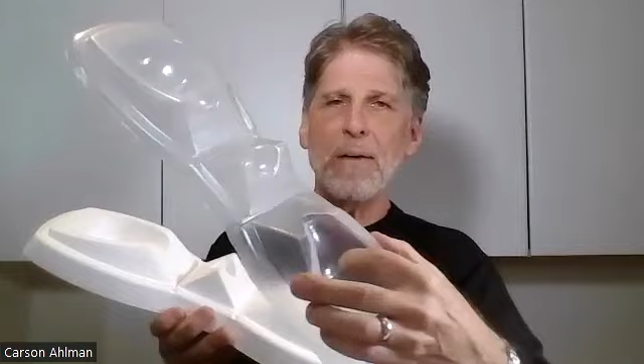And I have rough cut this out of a larger sheet. I'm going to do a more finite cut here along this line that I had drawn on the pattern. That'll be the edge of our flange. So the rest of this material here is excess. But I'm going to demonstrate how to vacuum form that part on there.

Like I mentioned, this is a trifold, so it's in three sections. So these three sections open up flat like this, and we have two hinge areas here, what they call living hinges, that allow this to fold up. What's nice about this, we can integrate our graphic component on the inside when it traps the product, and it completely protects that so it doesn't get dog-eared and beat up, so the graphic is on the inside.

I just duplicated the art on the front and the back, but this could be done with a front art motif and then back art, and then we actually have some printing areas on the bottom. The trifolds are great. They're very secure, have a good, strong footing on here, and then by having all these molded panels, it's very, very strong.

Trifolds are held together in a couple of different ways. One of the most popular ways is to use snap buttons. They would actually be these round little details up here in the top, and you have to cut a hole in your graphics so they can punch through that and they snap into one another. I don't particularly like them. I think they're very unsightly because you get these two pretty round giant holes cut into your graphic area, and they look a little awkward. They're very functional, but I think aesthetically they look odd.

A lot of the vacuum forms that we've seen, we have that complete heat sealed edge, which is completely tamper resistant. It's almost to the point where you just can't open the package. You need tools to get it open. I don't suggest that either. That's kind of the other extreme. I think some compromises aren't bad; since this is a very strong structure, all we really need to do is to seal this at the top.

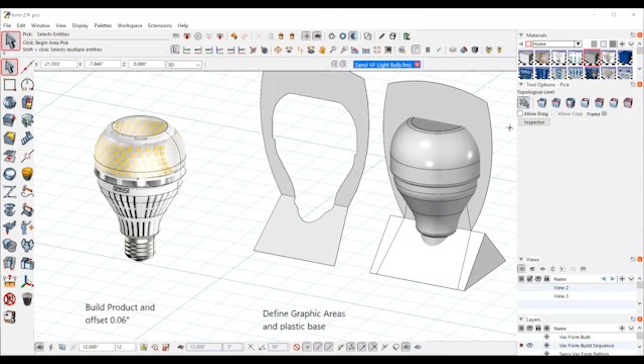So I built a light bulb. It's a pretty straightforward shape, so it's just a revolve. But I texture mapped a photograph on that for rendering purposes. So let's take that off so we can just see the basic shape. I'm just going to color that.

Take that off. All right, so what I did was I revolved that and then rotated it around and made two parts. And then what I would do is just cap off the top, cap off the bottom, and then make it a solid. Now, since this bulb is going to be formed in this pattern in a negative cavity, I need to account for wall thicknesses. So I'm going to do that right away.

So I'll take this light bulb here and I'm going to offset that by 60 thousandths because I am going to have a 30 thousandths wall in my plastic, and then I want to have a little bit of clearance, a little bit of space, just in case it's slightly off and it doesn't fit snug in there. So I'm going to add a little bit. So I'm going to offset that by 60 thousandths.

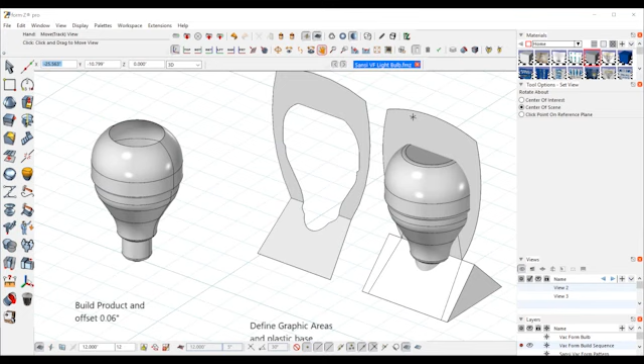And that's what this over here on the right, that's what this shape is. So it's a solid, and I offset it, and then I actually radius the top and the bottom there because that's part of the detail of the bulb. So what I'm going to focus on here is I want to start from the inside out. So that's my bulb. And I know I'm going to do a trifold vac form where it has three pieces.

Now, a trifold has the front and the back that's going to come around and trap the light bulb. And then most of the time, it's a triangular section at the bottom. So I'm going to start with that. Over here on the left is my full graphic area that's going to be on the inside. I want that to be a certain proportion and be thick enough and substantial enough so it doesn't break. So I'm starting with this side view of this triangular base.

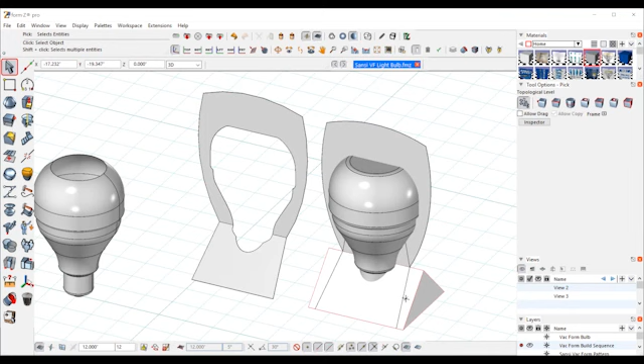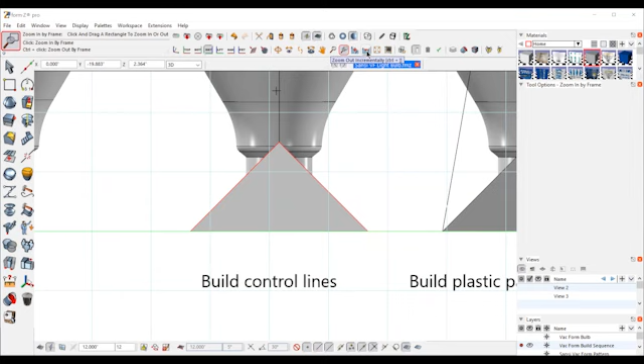So I'm going to look at that on the right side, and I can see how it's coming up around the bulb. It doesn't have to be a right triangle, but I used that and it seemed to work pretty well. So I got 45 degree on each side. It could be higher, could be whatever shape I wanted to, but I liked how high it came up on the bulb, and that was enough. And it also gives me enough of a graphic area on the base. So I'm going to have some SKU information down here on the bottom.

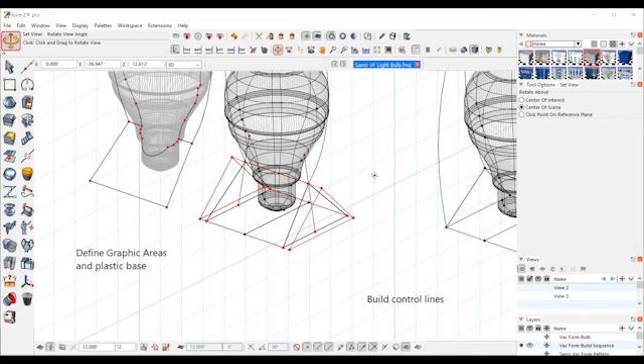So let's just go to wireframe for a second. So there I built my triangle, and then you can see I have these two angled lines on the sides. So I'm going to angle the sides of those so I can build in my draft angle, because I need this to come off the mold. And I also want to determine how much graphic area I'm going to have left. So let's look at that from the front.

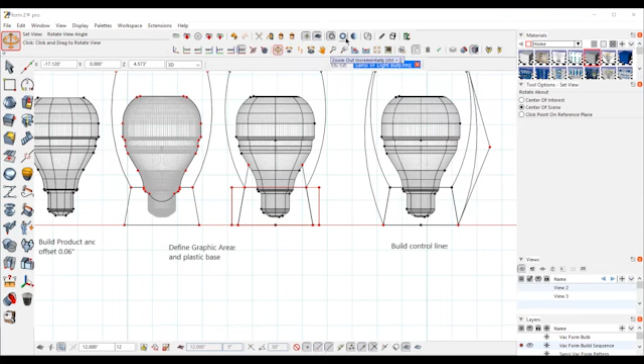So you can see I have these angles, and I'm going to cut that triangular section back down. So I think I probably put, looks like maybe 5 to 10 degrees, which is a safe amount of draft angle in there. So I have that on both sides. So when I trim that, I will have this image over here on the right. So that's the base trimmed, so that's ready to go.

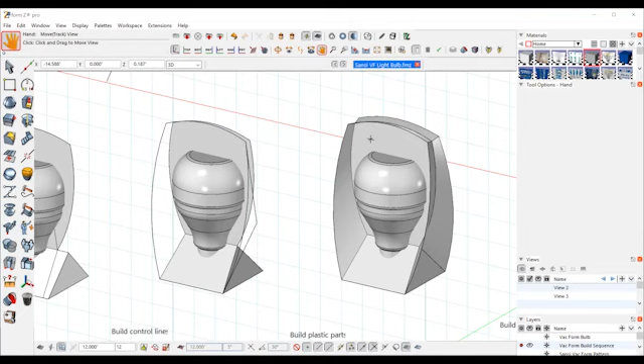So I also want this other beveled look here. I want the edges of the vacuum form to come up on this curve around the outside, and I'm going to work off of my full graphic area that I have here. Let me zoom in back over here. So here's my graphic panels. I differenced the bulb from that graphic panel, and I created that front area. So that looks like that'll work pretty well in the paperboard.

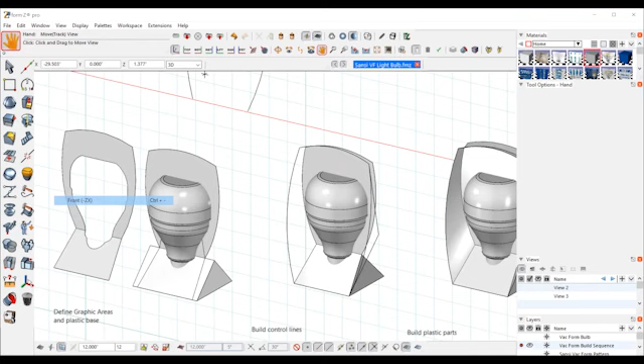So now I'm going to build from that and create the rest of these plastic parts. So I'm going to start with the front curve. And I have that at kind of a minimum draft. So you can see I have this difference off here. Let me go back. I'm going to work with this arc that I have on my graphic. So I'm going to select that. I'm going to move one copy on center.

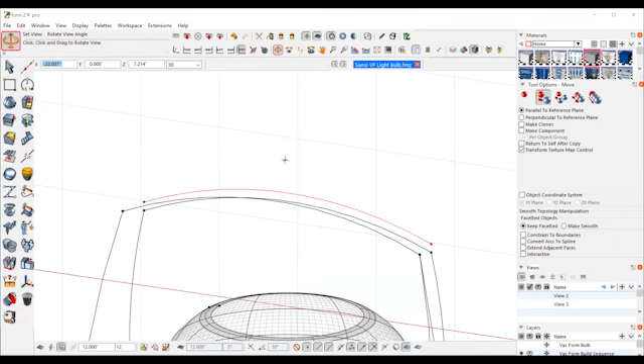And I had the line already created, but what I did was I just estimated how far away I wanted that from that top edge, because that's going to be pretty close to the top. It's going to be right back here, so it's not very far. So what I need to do is take that line, and I need to put that into the orientation that I want to have here on the front.

So what I did was I took that line and I independently scaled it. I'm going to go back to self, locking to the center. Oops, disengaged. Oh, I need to select that as an object. And I'm going to scale, snapping to the middle. And now I have that into position.

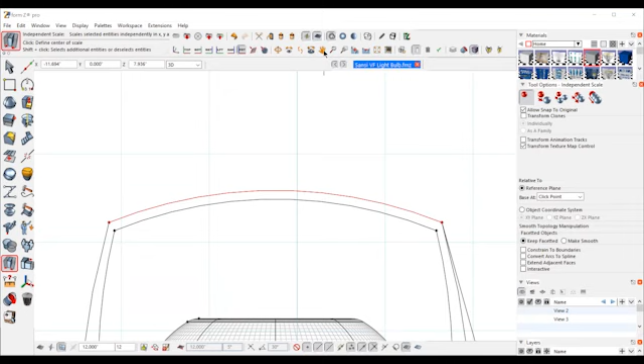I like the distance from that. Now I need to move this and get it to come up to this front panel. So now it's on center. So what I'm going to do is I need to bring that up front. So let's do that right here.

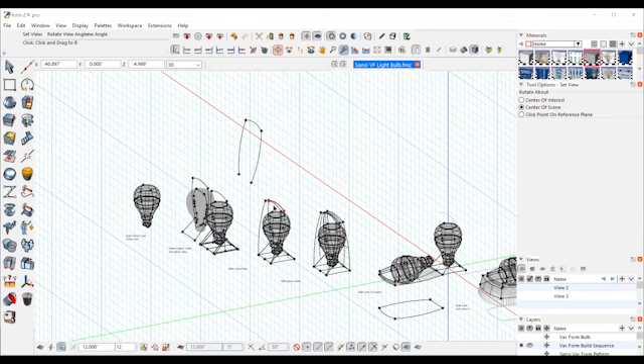So I have the lines already created. So what I did was, let's just look at this from the right side. So I just took this line, and at the time, I just estimated where I wanted to put that. Let me just lock that in there. So I brought it up front like this.

I need to create these other two lines that represent the front of this plastic part, but I need them to be exactly on the same plane. So right now, it is not on that plane. Because I do want to make that a surface so I can lock that all together and create a solid, which will be my pattern ultimately.

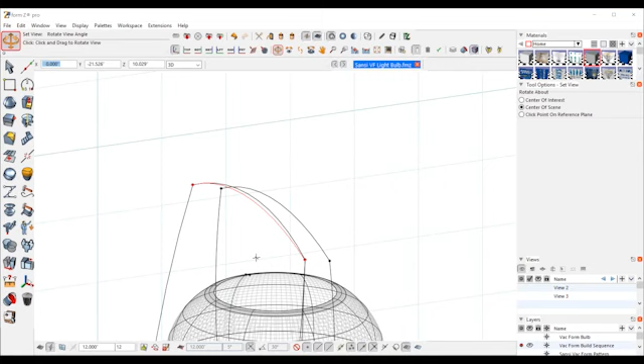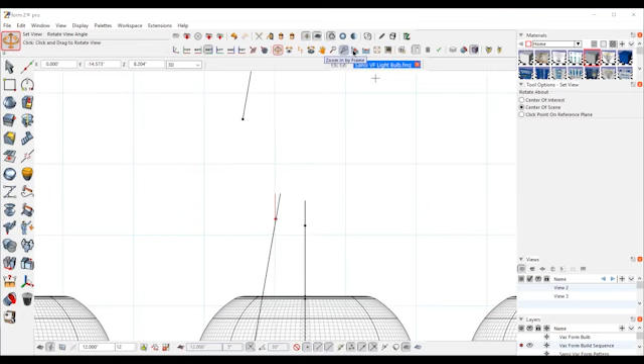So it's interesting with the pattern, we're building the mold that the plastic is going to be formed on. So I need to think about what that mold will look like, so I'll get my plastic part the way I need it. So what I need to do here is rotate. I'll show you how I'm going to do that. I need that to rotate back and be exactly on the same plane.

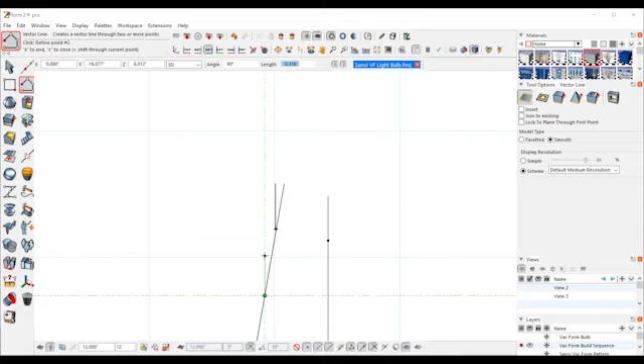So what I'm going to do is create a guideline. So right now I am snapping to this line. And I'm going to snap to another part of this line, and just double click. Now I can select that segment. Now that segment is on that plane.

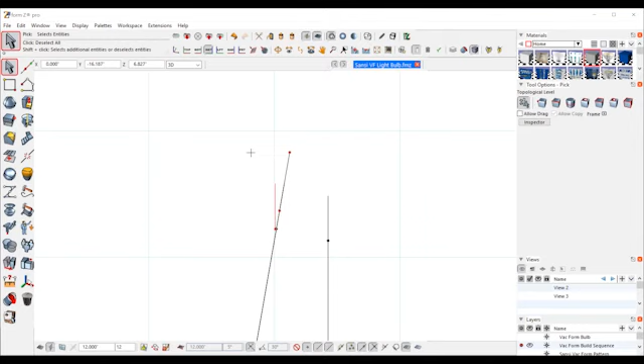So I'm going to move this. And I can really put it anywhere I want back on that line. So that's an extension of that. So let's make sure this is locked in. Looks like it's a little off. I'm just going to turn off my horizontal snap like this.

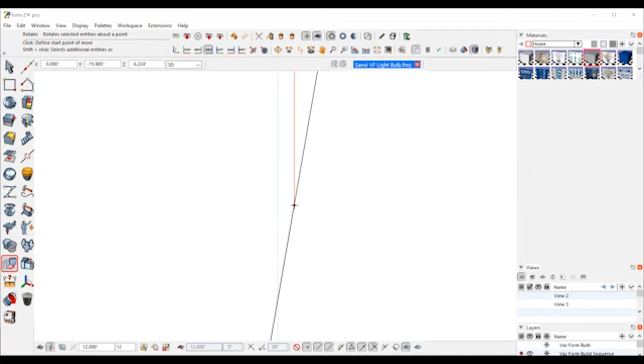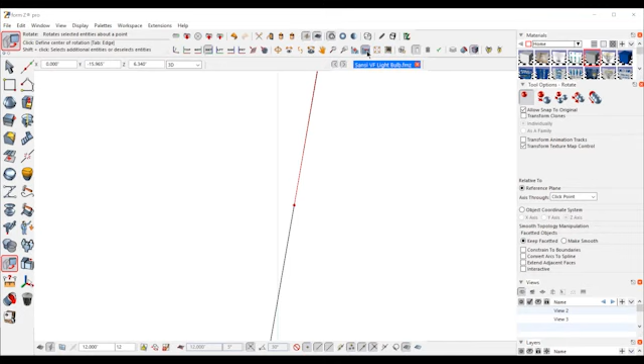I have to snap. Okay, I'm going to go back to my vertical horizontal snap. Okay, I need to snap that right to that line. So I will have that line directly in line with these other two segments that I have here.

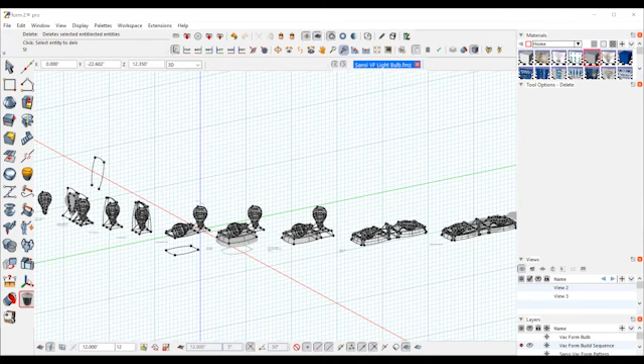Now these two segments that represent the front of that shroud, I created that by snapping to that point, coming down here, creating a straight line, and then I insert. Now I know that line is straight on that plane. So I inserted a point like this, and then I took that point and moved it out.

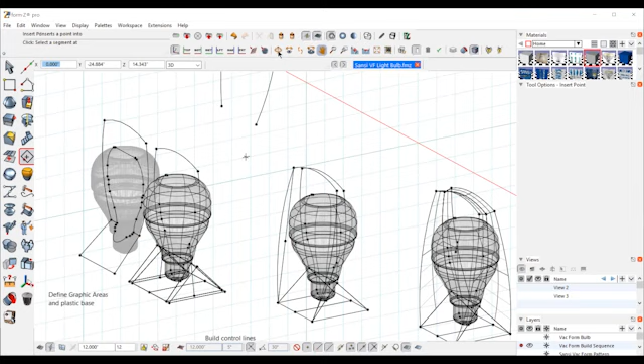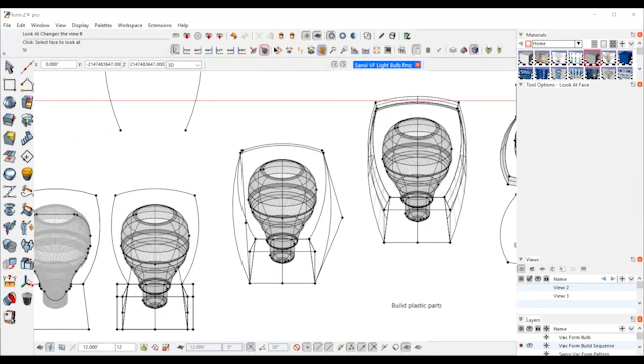I have an example of that right here already set up. I took that point, I moved it out, and moved it out to the side here, and then used my curve create to make that happen. I'm losing my cursor here. Hold on. This line right here. So I pulled the point out and I created that angle.

So I used curves create, C-curve. I'm not sure if I have it on 3. Let's see if that's what I did. So if I select this line with that point on there, okay, that's what I used. It creates that arc right on the same plane with the arc at the top. So when I connect all of those, I will have a surface, which is necessary. I'm just going to undo that.

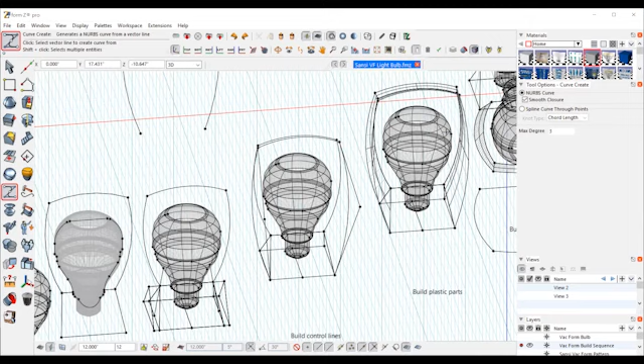So it's critical that I have all these together. So I took those 3 lines and I put them up here. The top arc mirrored over this other arc that I created. And I'm just going to join these together and do a test here to make sure that these all align. I'm going to join this to this to that. And then I'm going to use the close tool to close the bottom.

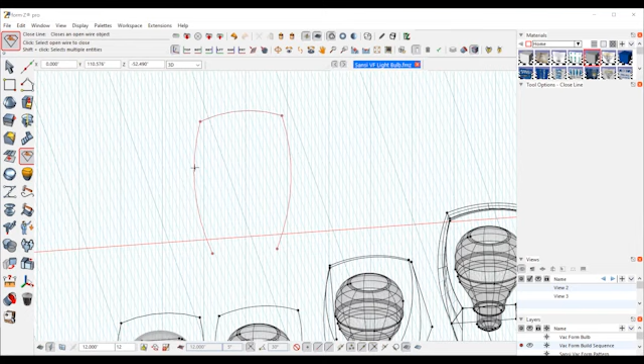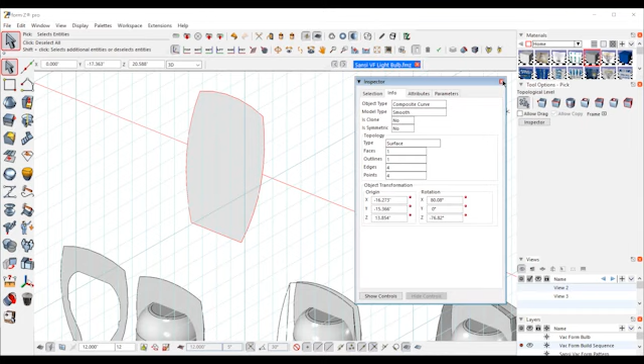And take a look at it here. So now it's in this gray color. So I know that that's a surface, and I can always check that. Because eventually I'm going to need to turn this whole massive part in the front into a solid. So under Inspector, Info, it's a surface. So I know it's not a closed line, so that's perfect. So that's just a little test to make sure that that was going to work.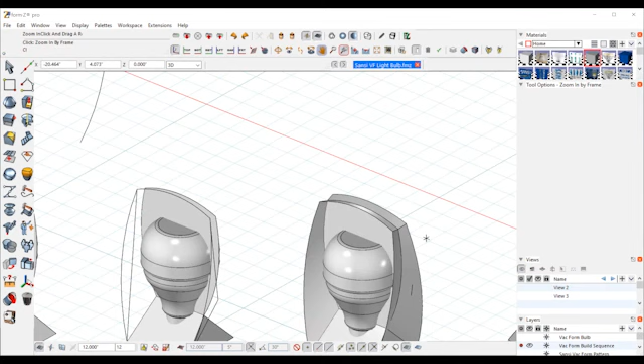Okay, so after I have that shape created, I can then do my lofting. So the lofting would be, let's just get rid of this straight line here. And I'm going to ghost. So I have those front lines ready to go, and I have the lines around the graphic. So what I can do now is take, let's get the grid out of the way.

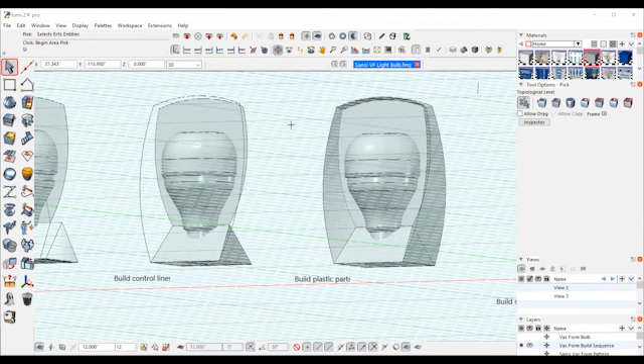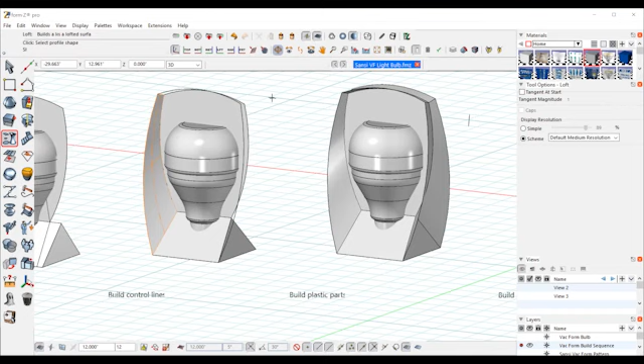I can select two segments. That one around the graphic, and then this front one right here. And I'm going to use the tangent loft tool here under the derive area. So I can take those two curves and select them and then loft them, and it creates that surface. And I'm going to do that on the right side and the top. And then I get this structure over here.

And that's essentially my design. So now I'm evaluating this aesthetically. I see where my graphics is going to be, where the bulb is going to sit inside. And I have the layout of how the plastic parts are going to work. So it would essentially look like this.

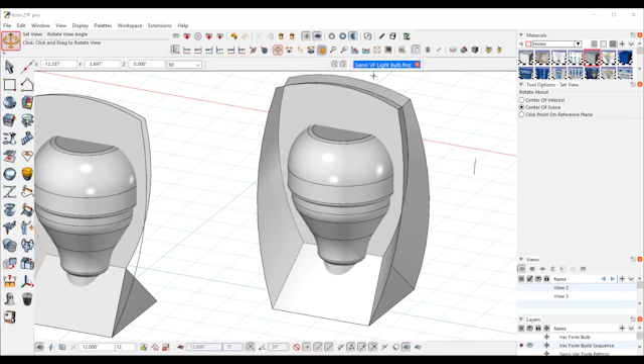I'm going to have to add some radiuses, and so there's going to be a flange area and things like that. But now I can evaluate the aesthetic, and I have all these angles, the draft angles and these curves that I think look attractive with the bulb. They're also very functional at the same time, so it'll come off the mold. So I'm thinking about both things at the same time.

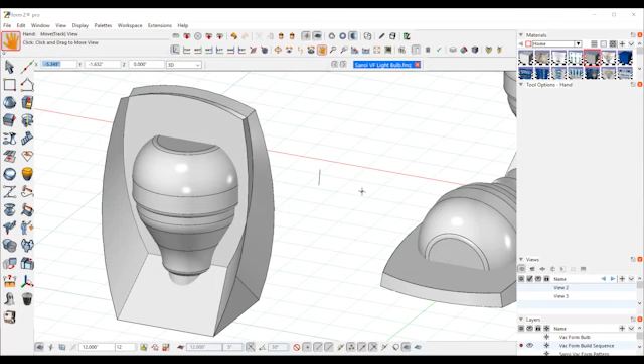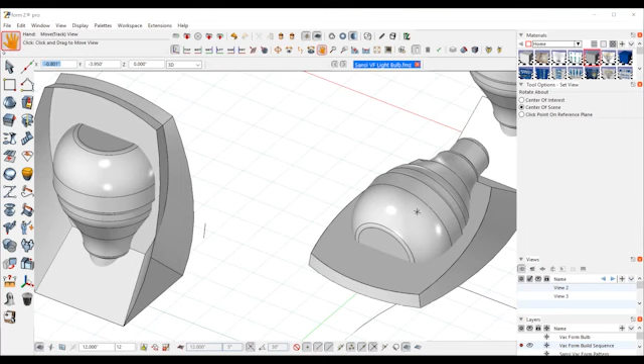So I'm at the point where I like the design, graphic area is good, and everything's looking fine. So now I got to turn this into solid parts that I'm going to use for a mold. So now I took all these front pieces, and all I did was rotate it down so it's flat. So you can see it's hollow from the bottom. I have my little notes here about what each step looks like. And I have the triangle here with the bulb also in position.

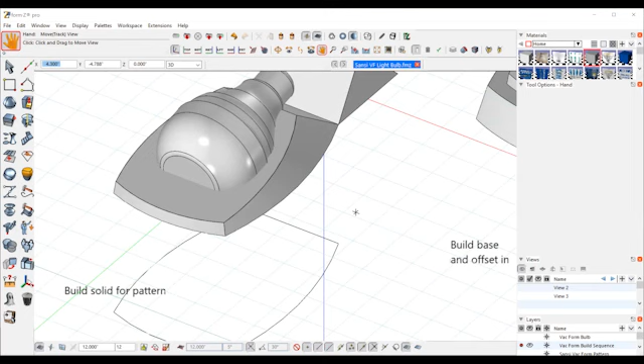So I just moved a copy of the bulb because I'm going to use that bulb to difference it from the triangular section and to also difference it from that front section. And then I'm going to mirror it around to create all those. So what I had to do is build a floor, a bottom for this, so I can close that up and make that into a solid. So I moved the lines around, brought that up, and then I stitched all those parts together to make that front wedge shape a solid.

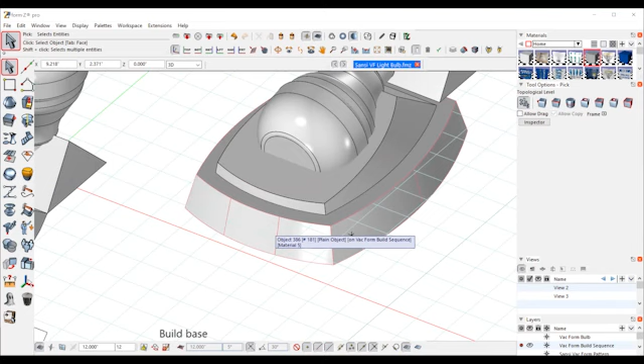So then after I had that complete, which is sitting right here on top, I needed to build this other step, which is going to be for my flange. I have this step out area. I had that about 3/8 of an inch. I offset the bottom of that piece and created that part. I'm not sure if I have that ghosted in here. You can see I have all these parts ghosted. So once I did that, I made that flanged piece, and I have that approximately 10 degrees of a draft angle also.

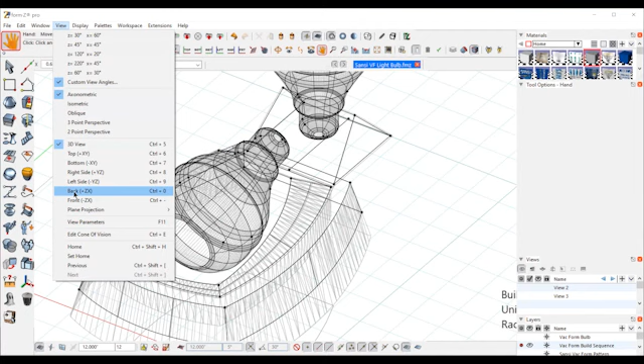I now need to compensate for the thickness of the plastic. I'll show you the little step I have. Because that plastic is now, you can see the gray area. So I offset this in. I think I did that at about 30 thousandths. Maybe I did a little bit more because the plastic is going to go over this triangular section in the center, and it's going to go over this other part here.

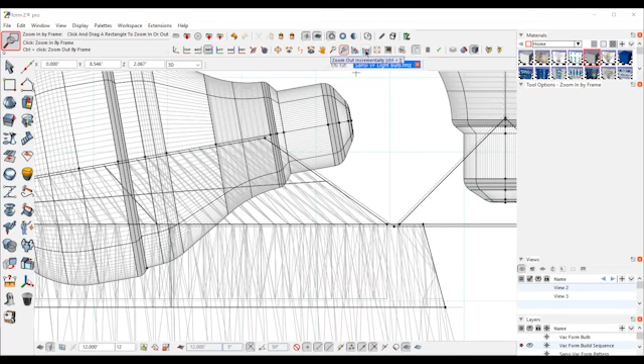So I need to offset that inward to give me enough room for the two layers of plastic, which are about 30 thousandths each. Plus my piece of cardboard has to fit inside of there also. So I probably offset that about 60 thousandths on each one of these. You can see that little gray line. So these are now smaller pieces and they're offset. And you can see it's slightly offset from the center of the light bulb because the cardboard is going to go around the light bulb.

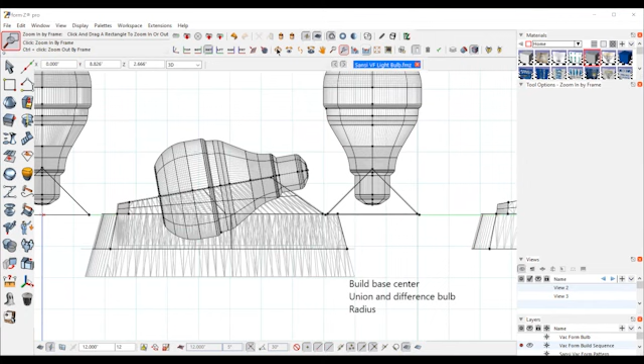So these are the compensations for tolerances that we have to make. And this one's a little complicated because it's a trifold. Pieces are folding up on top of one another. And I have allowances for the cardboard. So once I created those allowances and I made this extra base for my flange, I can then union these together.

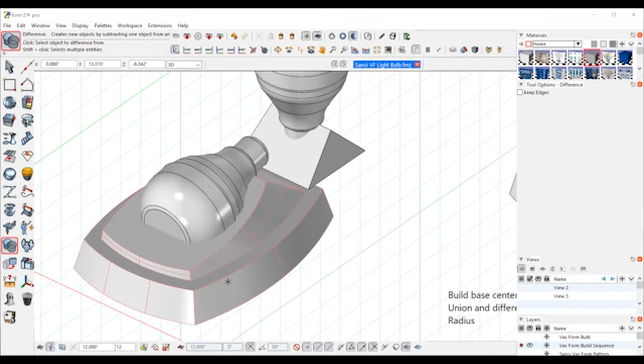So right now, these are separate pieces. So I would union these two together, and I would difference the bulb from that. So let's go to my union tool. So I could take this part, that part, and union that together. And now I can difference. So this is all one solid piece. So I'm going to select that. I'm going to difference the bulb from that. So that creates the cavity that the plastic is going to go into.

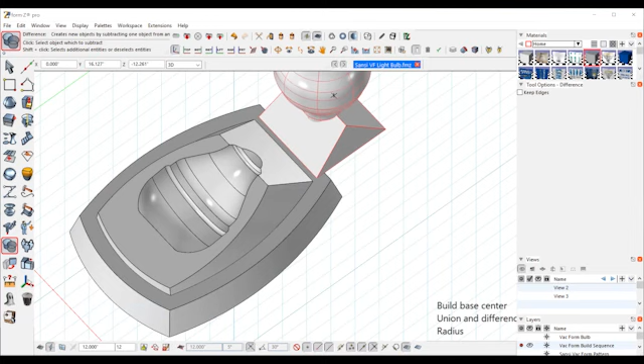And in the beginning, I had allowed that 60 thousandths, where I had offset the light bulb larger. So now this cavity is larger than the bulb, which allows me a tolerance to get the plastic inside and then a little extra so it's not a complete tight fit. Same thing will happen with this other triangular section. That would also be a differencing. So I'm going to grab the triangular section and then difference the bulb from it. And then that creates that cavity inside. And this is also tolerance because the bulb is bigger than it needs to be.

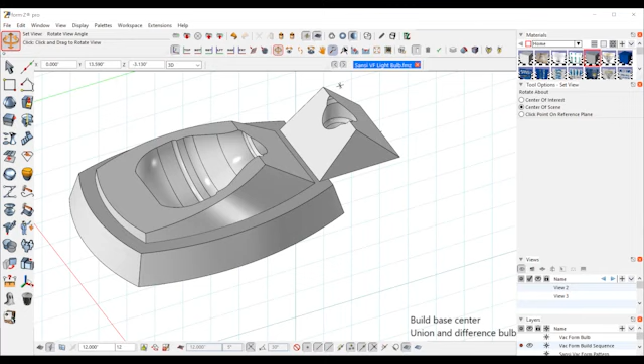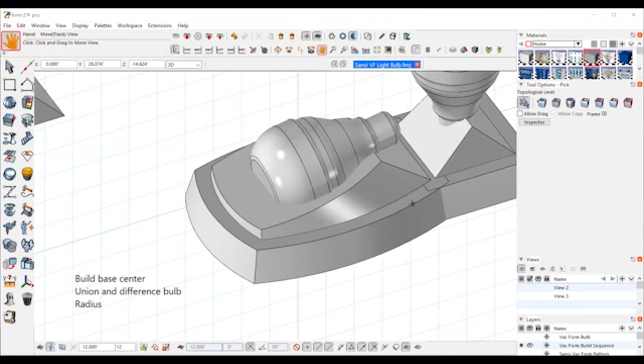Okay, now this little space between the parts, that came from my offset. I had them touching at first, but then I offset them both out 60 thousandths. So it created this little space. And I know I'm going to need that space. So I'm going to put a hinge detail in there to get that to fold up. So once I have those done, I have all of that's going to be tolerance and locked together. I need to build this center section. So I have another section under the triangular area that's stepped up in similar height and a similar draft angle to continue my flange across the bottom. So there's where I unioned and differenced the bulb at that stage.

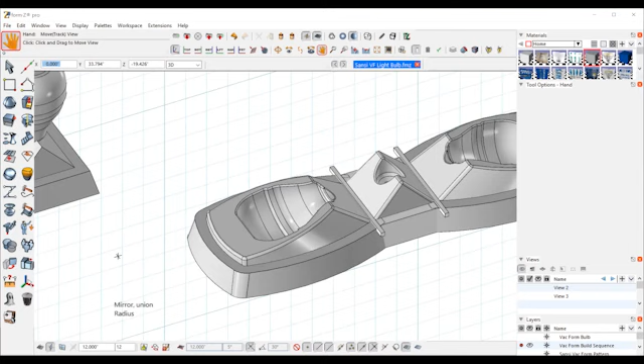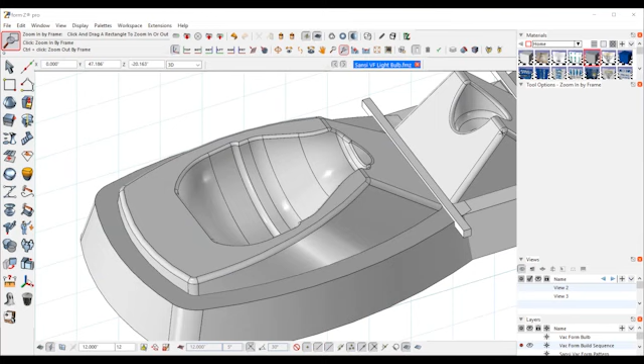So now I come over here, and what I did was I radiused these radiuses all around the top. I made these pretty tight because I don't want it to be too soft, and it's starting to take away from my graphic area. My graphic area will be on this surface. So I did those pretty small, probably about 60 thousandths all around. And then I did the center section a little bit more down here because it's quite a high peak. So once I radiused that on this front piece, now this is all solid and radiused, then all I have to do is mirror that to the other side because the parts are identical. So I'm just going to mirror that to the other side on center. And now I have all these three pieces ready to go.

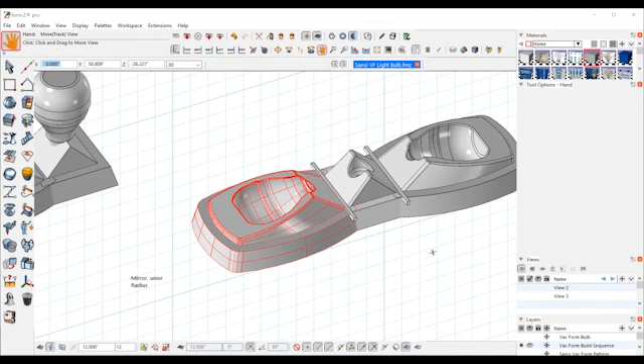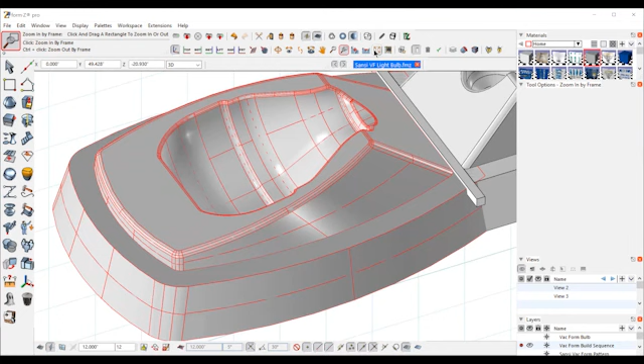So what I did was I took those three and unioned them all together. And then once I did that, I built these rectangular sections here, which are going to allow the plastic to go down into this little trough. And once they go in there, the plastic will suck down in there, and that will give me my hinge area. And then I have that on my last section right here. So there it is going down in. So the plastic will go in there and create that hinge. And then I radius this last corner all around here and the corners of this base. That is not part of my part, but if I do radius those, I'll make sure that the plastic doesn't start webbing and get stuck on those angles.

All I really want is this area. Let me just select that. For where my flange is going to be, I'm going to go to surface. So this area right here all around, that represents the end of my part. I'm going to trim that by hand after I make my part. And that'll be the flange area all around. The rest of it will be cut away. So this is ready to be exported as an STL. I'll probably do a polymesh to make it a nice, dense polymesh. And then I'm going to save that as an STL and make a 3D print.

Now the 3D print I'm going to use FDM. And it's going to be kind of a rough finish. It'll have some of the grow lines on it. So I'm going to have to do some finishing. So we'll see how that turns out. So I have another tutorial on how this works and how to make a vacuum form part from this.